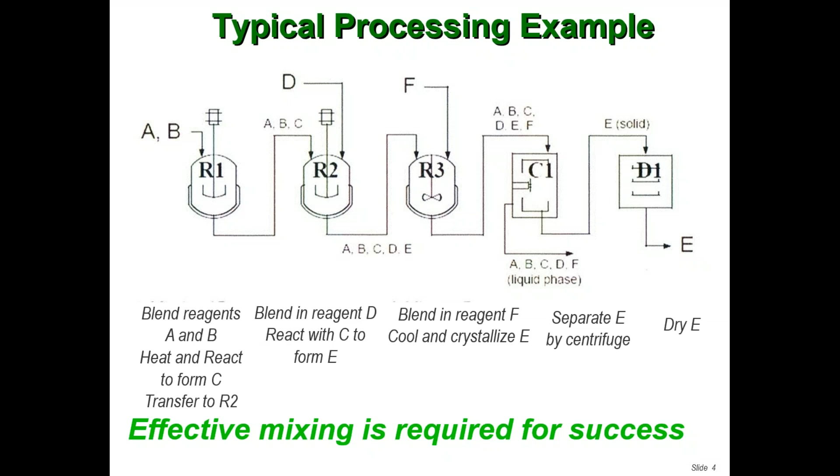So for the process to be successful, you see that for the blending, the reaction, the heat transfer, the cooling and crystallization, there is a device in there which we normally call a mixer. So it's important for the success of the process that the mixing is done effectively. That's one of the key messages that I want to share with you today.

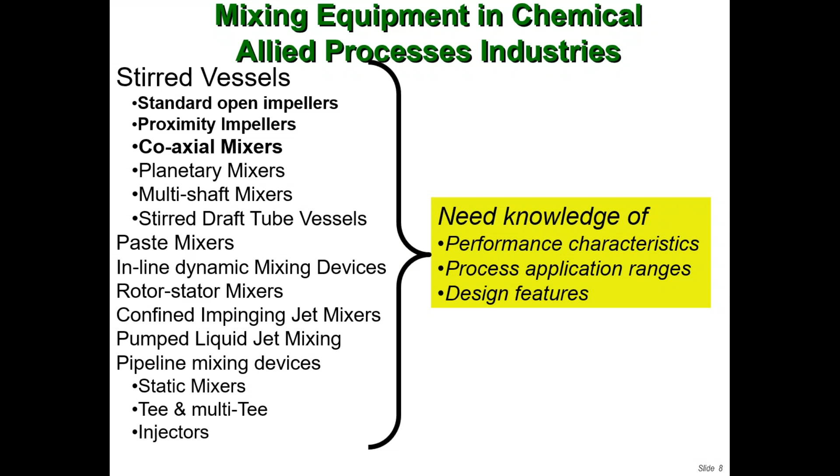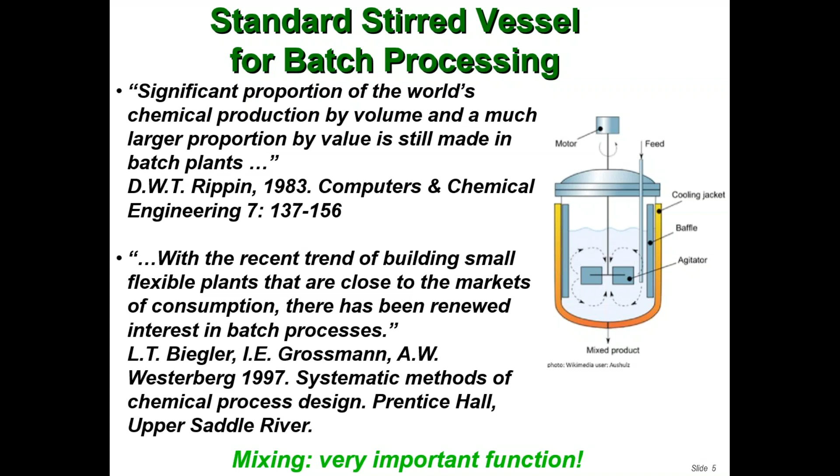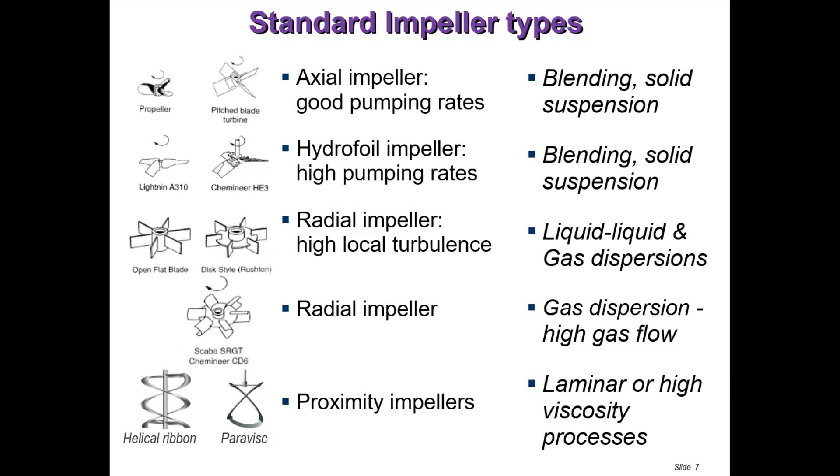In that piece of equipment, there is a variety of impeller types and so on. Today we're not going to spend time describing these various impellers, apart from this one slide. When we get to the device itself in the next webinar, we can talk about these impellers and how they're used. But this slide shows you some of the typical impellers that are used and what they are usually effective for.

If you are a process engineer, and I don't know all who are signed up for this webinar today, so I don't know your background, but if you're a process engineer, quite often your focus is on the pieces of equipment itself.

When I first started studying mixing, which I did at Dow when I worked there, it became very clear to me that it's misplaced to focus initially on the equipment. I think it's more important to look at the process, and particularly to ask some of these process-related questions. These questions seek understanding of the important phenomena in order to apply the necessary engineering science. If we do that, we are able to achieve the desired process results. The questions lead to identification of the potential risks in scale-up as well as process operation, and thus the preparation of appropriate contingency plans for risk management.

So in this webinar, we're going to be looking at some of these important mixing phenomena.

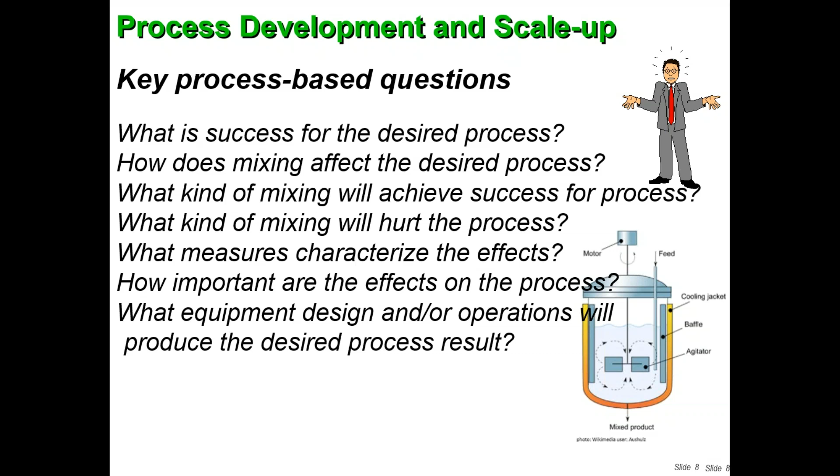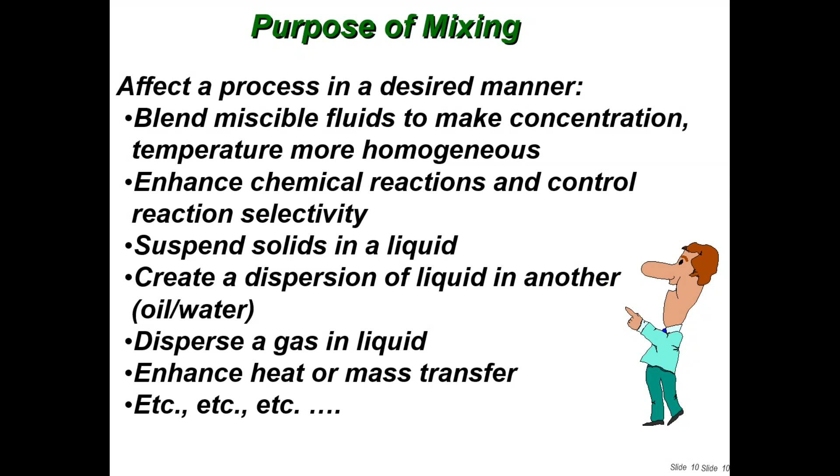This has been a working definition that I've used all the time, the 34 years that I was at Dow. And it served a purpose because what I've tried to do is encourage people to avoid the use of the word mix in describing what occurs in the process vessel. Instead, use words that will help them describe what is happening in the process, in the fluid.

My mentor used to tell me that it's good to imagine that you are a Maxwell demon attached to a molecule in the fluid, experiencing various phenomena. If you are able to describe the phenomena occurring whilst you're floating around in the vessel, I think it gives you a much better insight as to what is happening and what you need to do to be successful in your process.

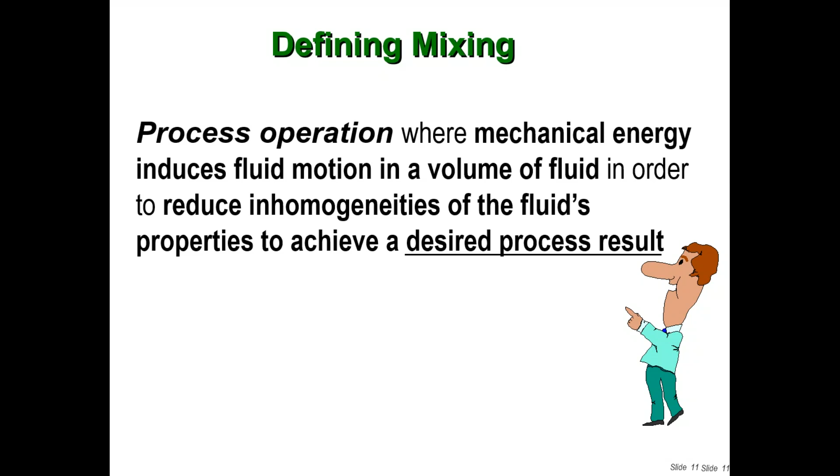So with that definition, we see that a mixer converts mechanical energy into kinetic energy to induce a hydrodynamic environment in the vessel. There is bulk or macro flow occurring, and there are microflow turbulent eddies also occurring. As a result of the different velocity gradients and so on, there's shear stresses and strains also occurring in the vessel. What we need to do is make use of all of this.

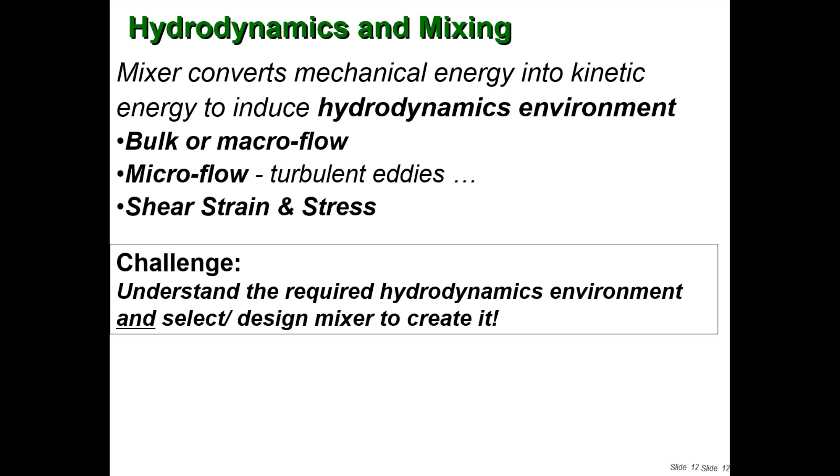The challenge is to understand this hydrodynamic environment and select and design a mixer to create the environment that is best suited for the success of the process. So the goal is to use the energy efficiently, to convert the mechanical energy efficiently to create the appropriate hydrodynamic environment.

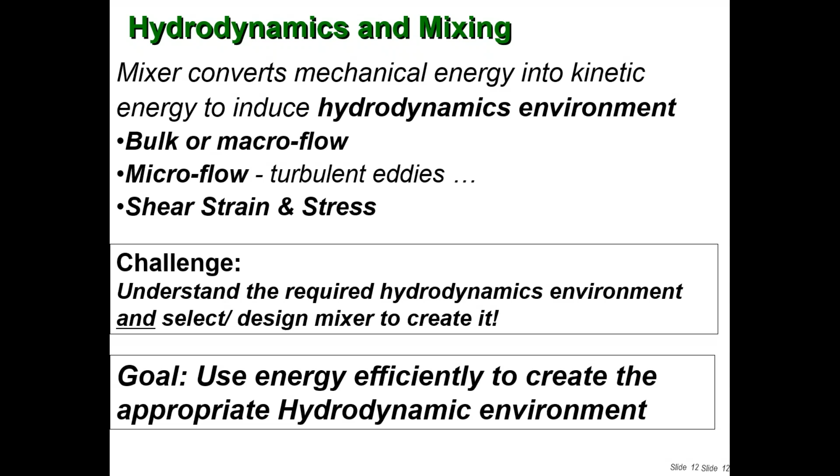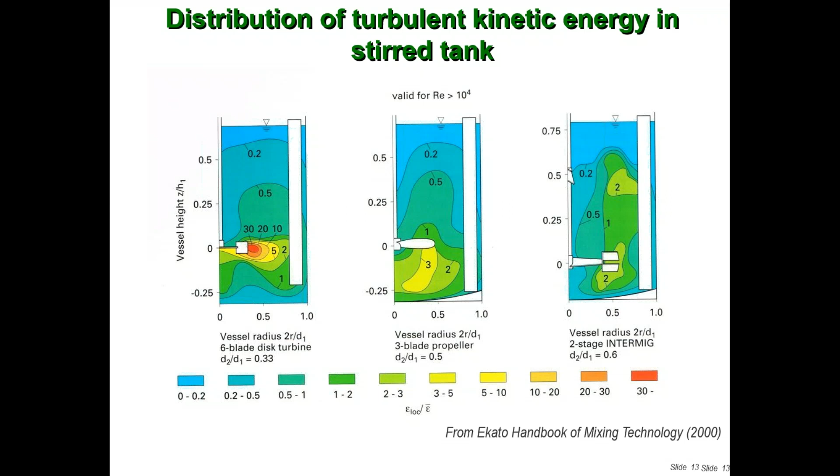Just a couple of years ago, Professor Suzanne Kresta in Canada noted this paper was one of the most read articles from the Journal of Industrial Engineering, Chemistry and Research in 2011. It's instructive that Octave Levenspiel did not use the word mixing, and instead used flow patterns and contacting, that is hydrodynamics. Further, he did not say chemistry, instead he said kinetics. His message is one cannot design an effective reactor without paying close attention to the hydrodynamics, flow patterns, and contacting.

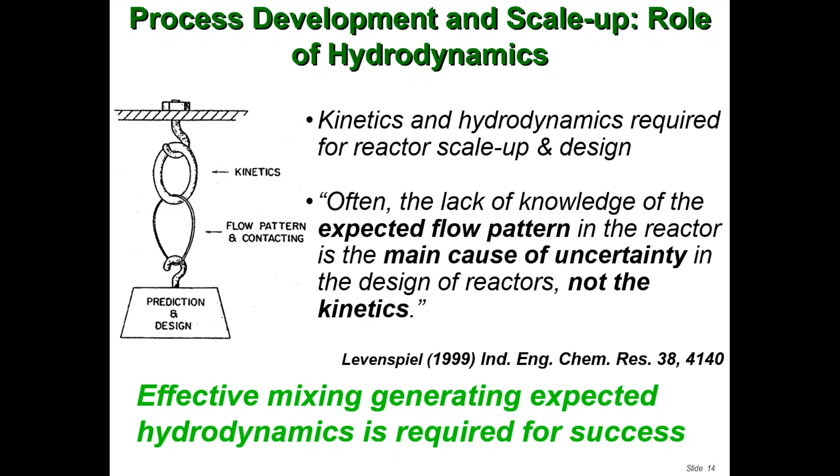So the lack of knowledge of the complete kinetics may not be as consequential. My experience is indeed very true. One can have the complete kinetics, but if the necessary hydrodynamics are not realized, the results can be disastrous. So effective mixing, generating the expected hydrodynamics, is required for success.

Now, the hydrodynamics in a vessel can be classified as laminar or turbulent. And indeed, when we talk about Visimix in the next webinar, you will find out there are two sets of tools, one devoted to laminar mixing and a couple devoted to turbulent mixing.

And the hydrodynamic parameter used to describe whether you are in laminar or turbulent flow is obviously the Reynolds number, which depends on the fluid properties, the density rho, viscosity mu, and also a characteristic fluid velocity in the vessel, and a characteristic length scale of equipment.

Typically, in the mixing literature, you find that the characteristic velocity is the tip speed, or the impeller diameter times the impeller rotational speed. And the characteristic dimension is d, the impeller diameter.

Now, Visimix does not use those characteristics, velocity and diameter, and we'll talk about that when we discuss the tools themselves in the next session. But the point here is that the consequences of being in laminar or turbulent flow needs to be paid attention to, because the mixing mechanisms are different and the equipment requirements also differ. You'll see that when we address the next webinar, when we talk about the Visimix tool.

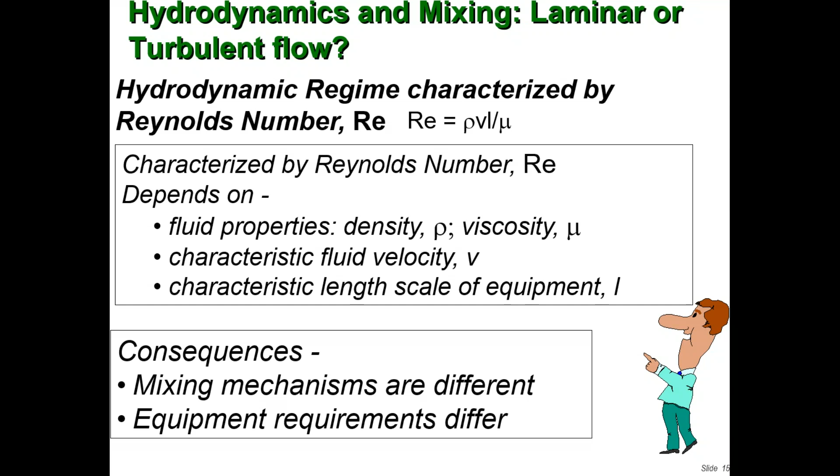Now, most of you spend some time in the kitchen preparing various things.

I want us to consider these cases in describing mixing processes.

Preparing a drink, rum and coke, or sweetening tea and coffee with honey or granular sugar, or making salad dressing using oil and vinegar, or preparing bread dough with flour and water.

Now, when we do these things, we use a variety of equipment. For the first one, we can just use a straw to stir your rum and coke, or a spoon to stir your coffee, and when you add the honey or granular sugar, you dissolve it and distribute it uniformly so that the first sip is as good as the last. Or when you prepare salad dressing with oil and vinegar, whatever tool you use to distribute the oil into the vinegar.

The key point here is that in each case, when we do these things, we use the word mix or stir. But it's very obvious that we are dealing with totally different phenomena in the rum and coke, sweetening tea and coffee, making salad, and so on.

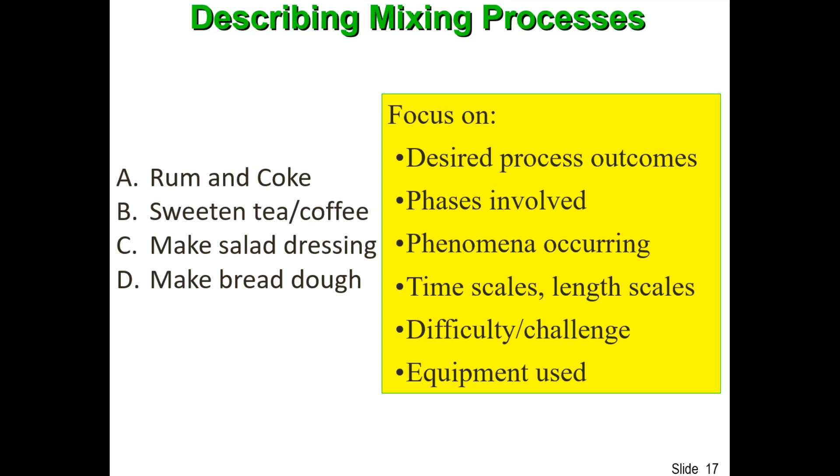When I was there, one of the things I kept pressing, telling people about, is that when you're doing process R&D or scale up, you need to pay attention to both physical properties - phases, densities, viscosities, and rheology - and of course the chemistry, whether you have chemical equilibrium or kinetics, fast or slow, you pay attention to all of those. But then also, as I've already mentioned in previous slides, the hydrodynamics and the various other transport phenomena that are important for your process, mass transfer or heat transfer.

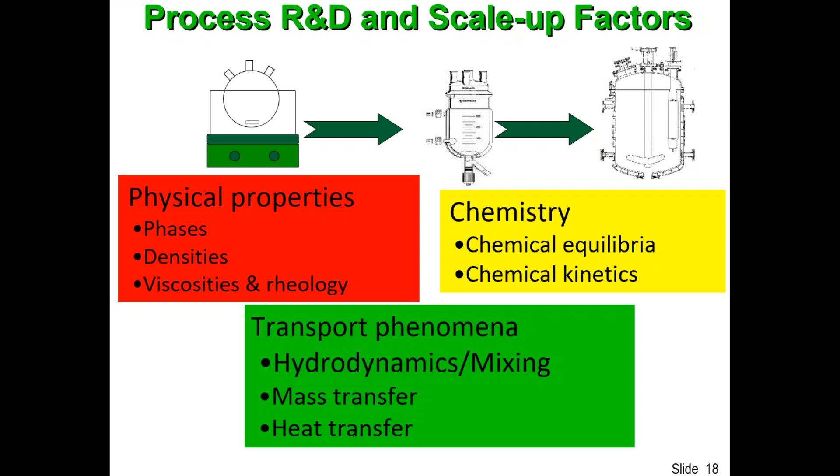If you do not pay attention to all of these things, the likelihood is that something is going to bite you, and you're going to suffer in achieving the success in the process that you desire.

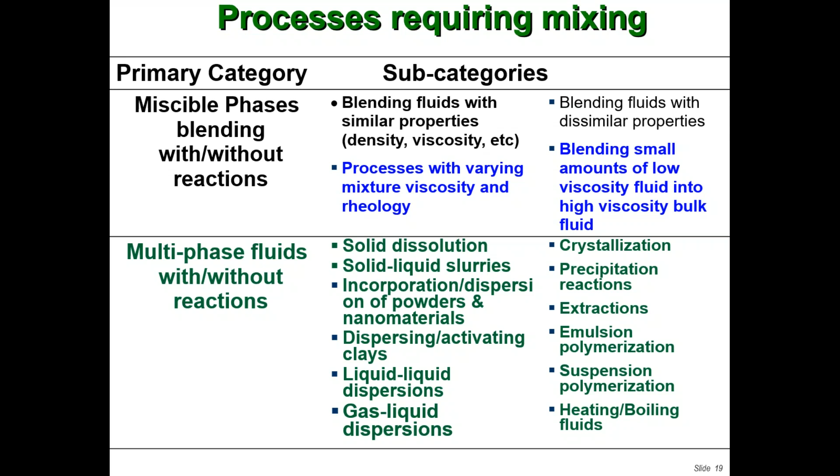So here again is a list of various processes that are carried out. And as I said, this is not intended to be exhaustive in any way. I'm sure you can come up with other things that we can add to this list.

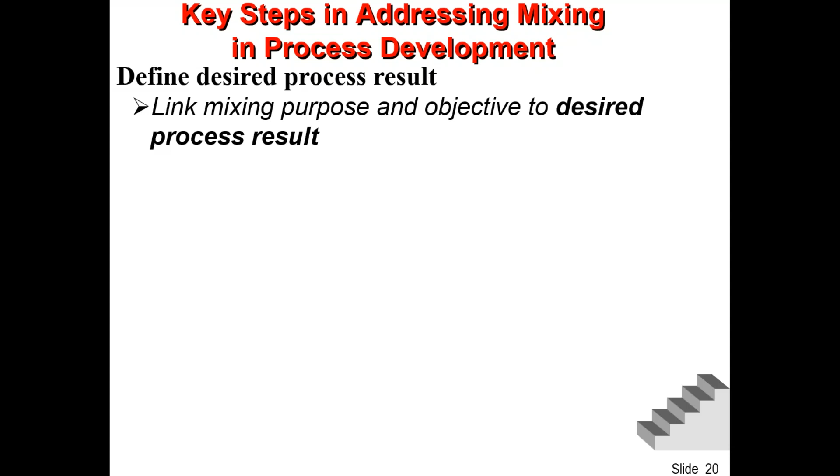But one of the things I learned in my time at Dow is that it's important to have in mind some key steps in addressing mixing in process development or in the process plant. Always start with identifying the desired process result and find a way to link that to the purpose of mixing.

Now, once you do this, the next stage is to perform some analysis. The analysis could be either experimental or you could do some modeling. People do computational fluid dynamics sometimes, but there are also simpler tools like Visimix, which we'll talk about in the next webinar. So you do this analysis to confirm or identify the mixing phenomena occurring and how it relates to the desired process result.

Once you do that, you can then recommend or select equipment and operating conditions that would be best to achieve the desired process result. And after you've done that, you need to ascertain the reliability of the mechanical design.

You will find that the Visimix tool allows you to do all of these things that I have listed here. Sometimes the folks at Visimix will tell you that using Visimix, you can avoid doing experiments. And I tell them that's not true. You can minimize the number of experiments that you do, but it's always good to confirm some of these things with experimentation.

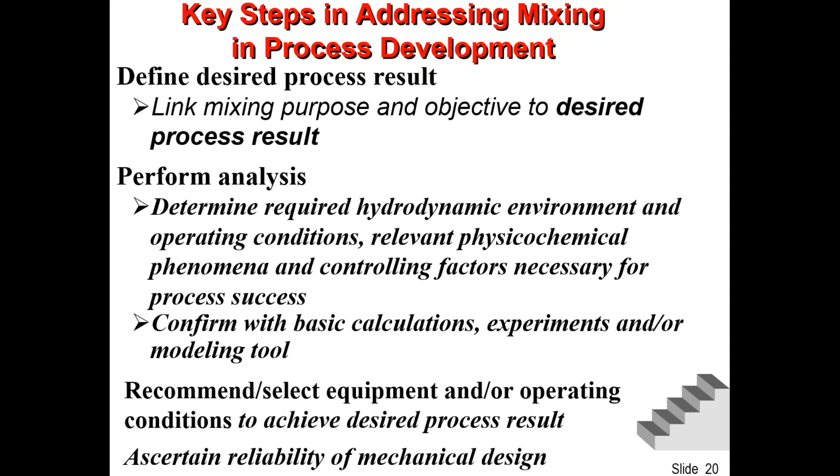So now let's take a look at some of these different mixing phenomena that occur in various mixing equipment and stirred vessels. The first one we're going to look at is the phenomena of blending.

So if the dye were to react, reaction rates will vary throughout the vessel because of the difference in concentration. If there are multiple competing reactions that are faster than the mixing action, the outcome may be different from what is desired. There's one slide that we'll take a look at for that.

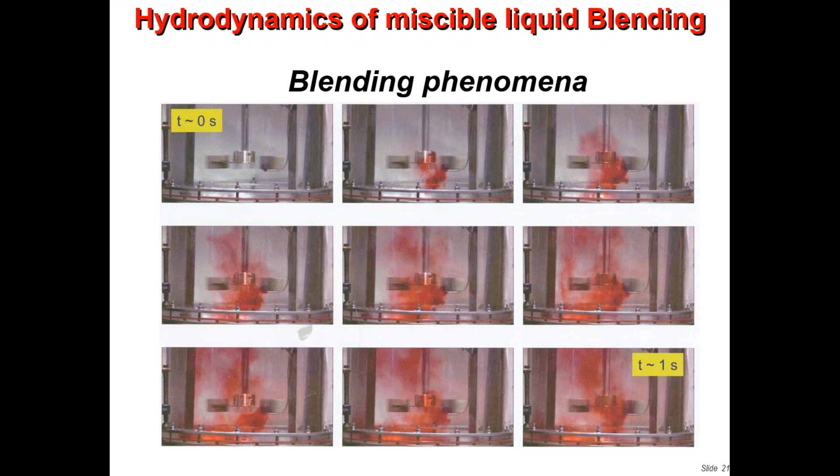If you use a different impeller, if you add at different rates, if the additive or reagent you're adding has different fluid properties than the bulk, the speed of the stirrer, its size, design, location, and the vessel internals such as baffles or heating and cooling coils - one needs to pay attention to all of these.

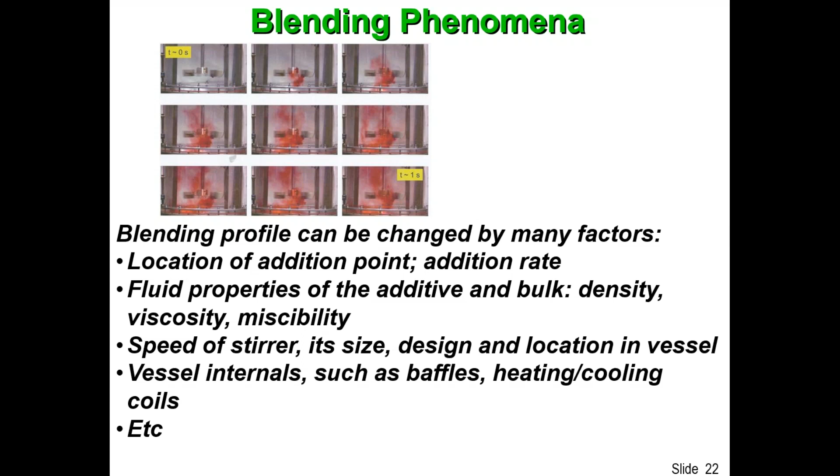If you look at solid-liquid mixing, the goal is to suspend particles - in other words, pick up the particles from the base of the vessel. Because if they are denser than the liquid, they want to settle, and your goal is to pick them up from the base of the vessel and separate them.

If you have very light solids, the challenge will be to wet the solids - in other words, spread the liquid all over the entire surface, or to draw down the particles from the liquid surface into the fluid.

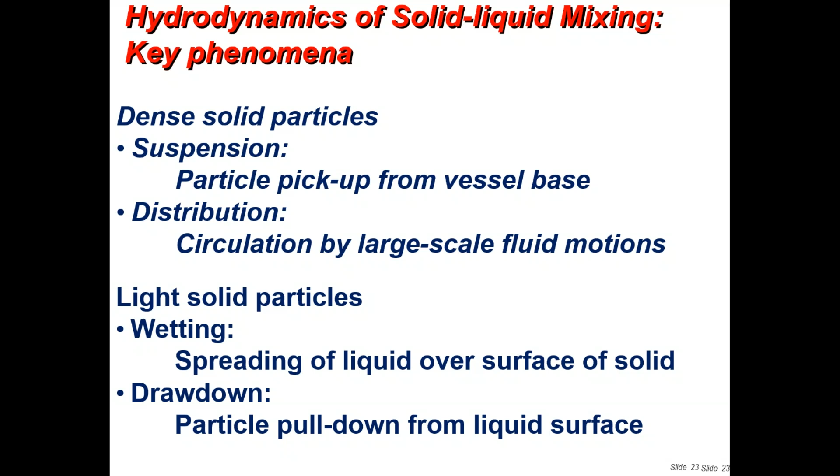This is something that early in my career I came across courtesy of Lightnin, another company that made mixers. I showed these 3 panels here, showing three tanks of the same dimensions, with 3 different impellers, different sizes, with different D over T's - impeller diameter to tank diameter - operating at different speeds.

The performance of the impeller in its ability to suspend these solids varies significantly. In each tank, you're putting in the same amount of power, but the torque, as defined there, is very different. In fact, the biggest torque - the vessel that requires the biggest gearbox - is the panel on the right. Yet that's the one that, if your intent is to lift particles up, does the poorest job.

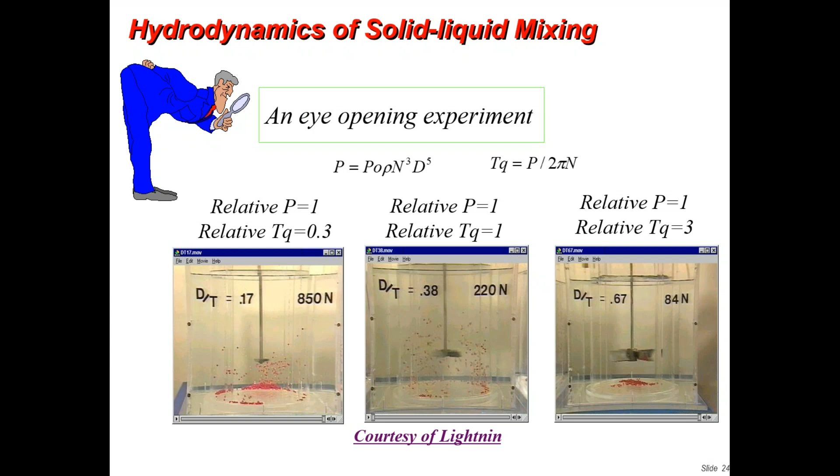I don't know whether these videos will play, so I will avoid them for now. Let's move on.

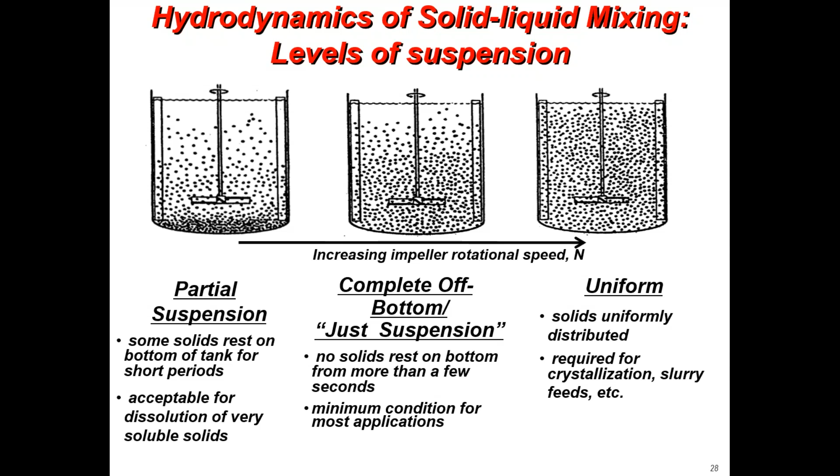For example, partial suspension may be acceptable for dissolution of very soluble solids. You don't need to lift them all up - if they're very soluble and you keep swirling them at the bottom of the vessel, that would be sufficient, and so that's what you do.

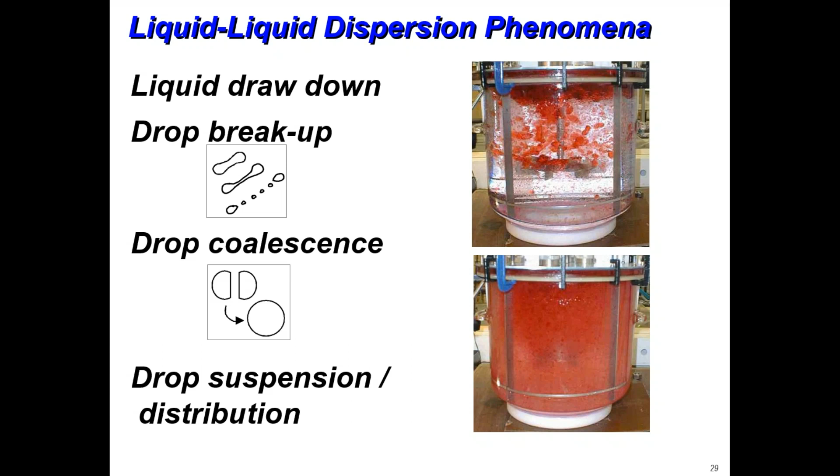Another phenomenon is liquid-liquid dispersion, where you're taking drops and breaking them up. But when the drops meet each other, they coalesce, depending on the force of collision and the viscosity of the fluid between them, and can form a bigger drop. So both drop breakup and coalescence are going on, but you also want to distribute these drops in the vessel uniformly, depending on the process you're carrying out.

Drop breakup and dispersion requires a threshold of energy - you need to put in a certain minimum amount of energy before you can actually break drops. It's easier with bigger drops, and it's facilitated in liquids with lower viscosities and lower interfacial tension, so you can add surfactants and stabilizers. But drop coalescence and aggregation will continue even when you're breaking drops, and these are also influenced by the energy input and the properties of your fluid.

This is a challenging area for processes, but when we talk about Visimix in the next discussion, we find out that we're able to use Visimix to actually do some drop size calculations and distribution and so on. We'll address some of the physics involved when we get there in the next webinar.

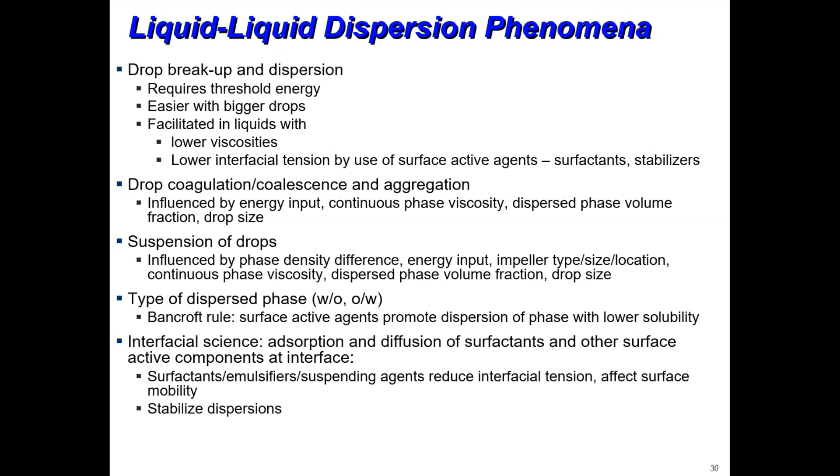Liquid-liquid dispersion process objectives will vary according to the desired product, but they would include the nature of the dispersion, whether it's oil in water or water in oil, or sometimes complexes like oil in water in oil, the drop size distribution, the time it takes to reach a certain equilibrium drop size, and the stability of the dispersion.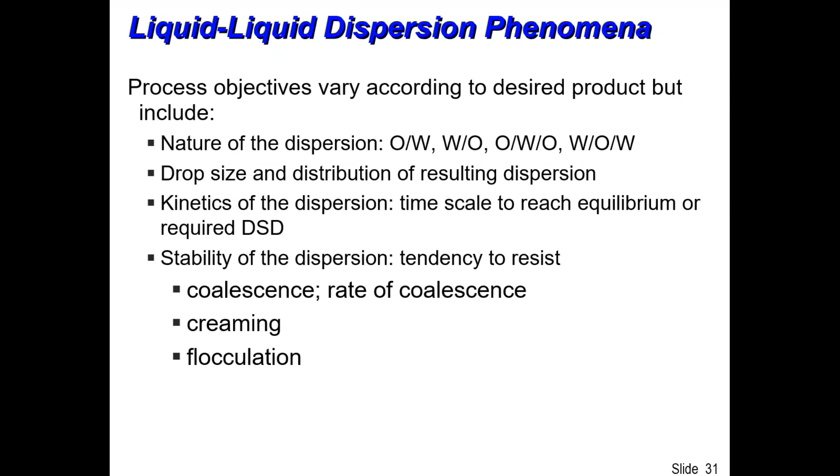Some of these things are very challenging, and I don't know of any tools out there that are able to address all aspects of liquid-liquid dispersion yet, including the tendency to resist the coalescence rate that is occurring.

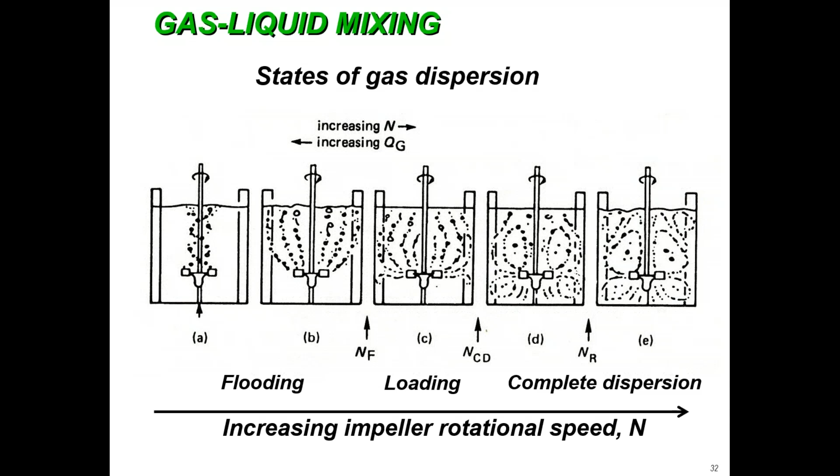In gas-liquid mixing, we are also breaking up bubbles. We bring gas in and we want to break up the bubbles into small bubbles to create interfacial area and distribute them uniformly throughout the vessel, again to affect the process that we are carrying out.

For reactions, mixing affects how reactants are brought together, and they determine the local concentration and temperature, reaction rate, and other properties. Thus it affects the course of the reaction rate and selectivity.

For single reactions, blending can affect concentration of reactants and reaction rate. For multiple reactions, blending can also affect selectivity. For multiphase systems, mixing affects drop and bubble sizes and thus the interfacial area for mass transfer. So it's important to vary mixing in your studies to determine the effects of mixing and which is important.

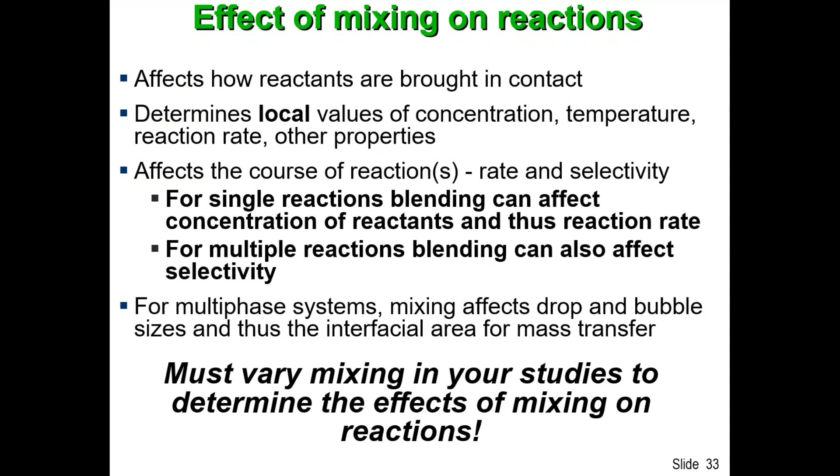Here's an example, something that some of you have seen many times before. We have a case with two reactions: the desired reaction is A reacts with B to form R, and R reacts with B to form S. Let's suppose you've segregated reagents A and B perfectly, say with some special membrane. Then you take out the membrane.

Now you can see in this left panel at the bottom what happened. These two A's will react and form R. But if the mixing is poor, what you'll end up with is that the R will react with B and you form S. So what you get is this condition, which is most undesirable.

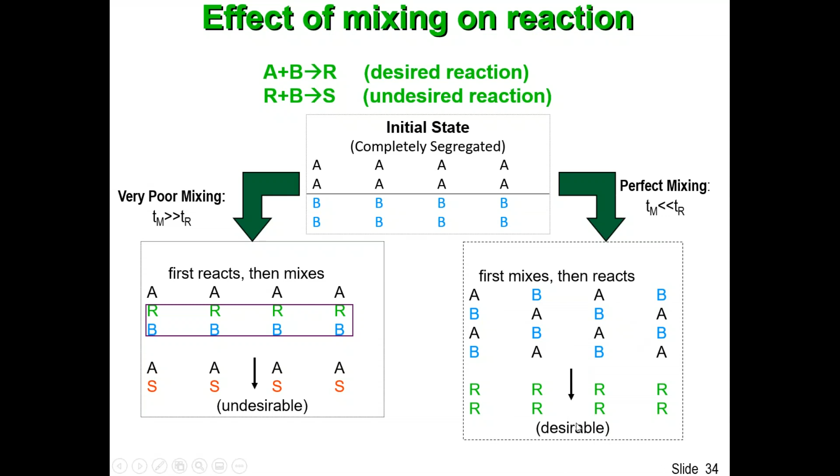However, if you have very good mixing, when you take out this special membrane and you have full mixing of all the molecules, you'll be able to successfully form only R, and that's what you desire.

This is an example from the literature, Chemical Engineering Science, 1995, published by Baldyga. The only thing he's doing here is using two similar vessels with the same impellers, and the only difference is the location where the reagents are added. It's a precipitation reaction being carried out. In one vessel, the reagents are added right near the impeller; in the other, they're added at the top of the liquid.

You can see with the supersaturation profiles that the results of the products you get are very different. With the sharp supersaturation profile, many small crystals and a non-uniform crystal size distribution are formed. With the broad supersaturation profile, you get larger and more uniform crystals. So again, it depends on what it is that you desire to do.

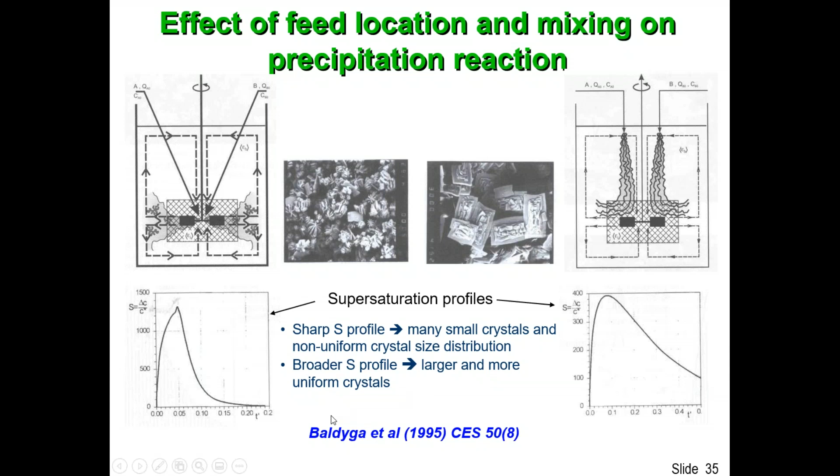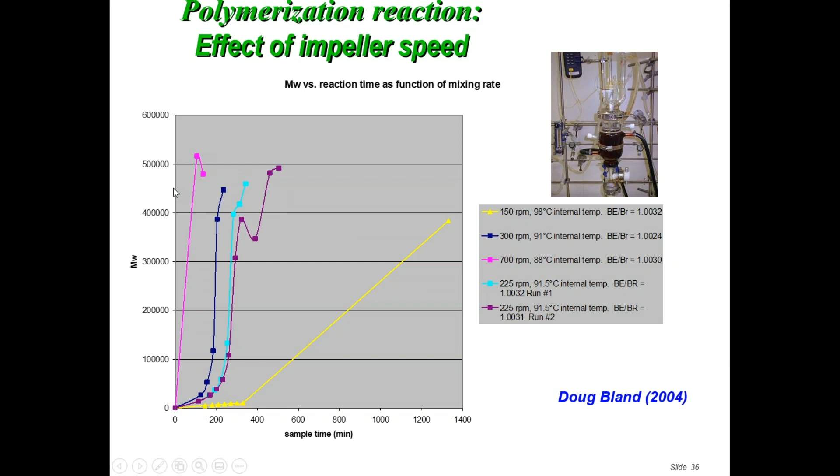Here's a case of a polymerization reaction, and all you're doing is changing the impeller speed in this small vessel. The first time the chemist did it, he ran it at 150 RPM at 98 degrees C. He kept taking samples and it seemed like nothing was happening, so he left it for many days, and then saw the reaction was taking place, but very slowly. So when he sped up the impeller, look at the changes that happened: the reaction is done, in this case at 700 RPM, in less than 200 minutes.

Here's an example of a very complex reaction where you're reacting an amine with chloroacetyl chloride, with sodium bicarbonate as a solid in water. You try to provide a buffer solution and also react the HCl that is formed. So it's a very complex reaction: you have solids, immiscible liquids, the product is also a solid, and you have gases that are released.

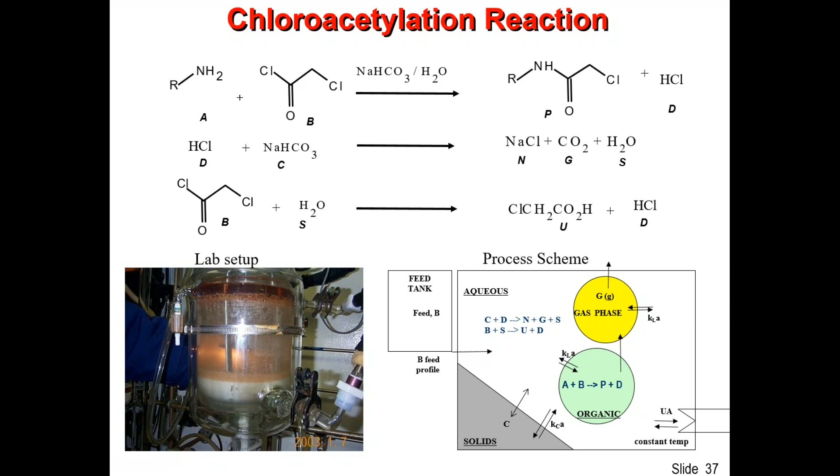By putting different numbers of impellers running at different RPM, varying the feed rate of the reagent and so on, you can affect the yield that you get.

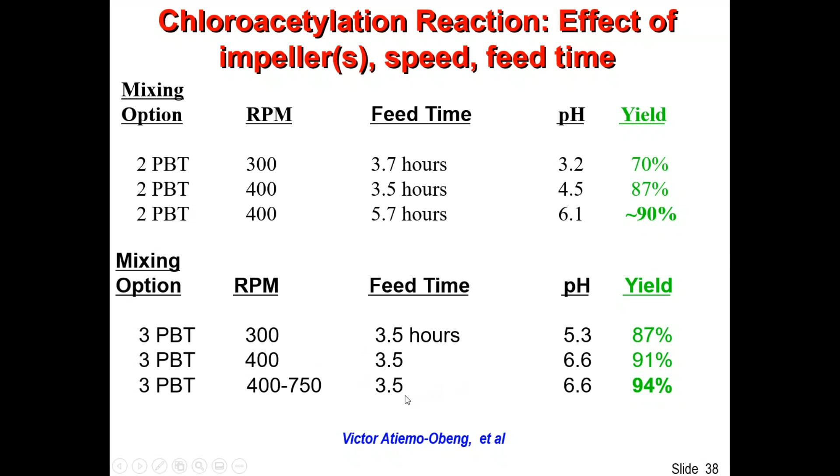So the message that I want to leave with you is that mixing challenges require close attention. If all you're doing is blending rum and coke, well, it's an easy objective and easily achieved. If you're doing scale up, it's important that you pay attention to what it is you're doing. If you have multi-phase systems,

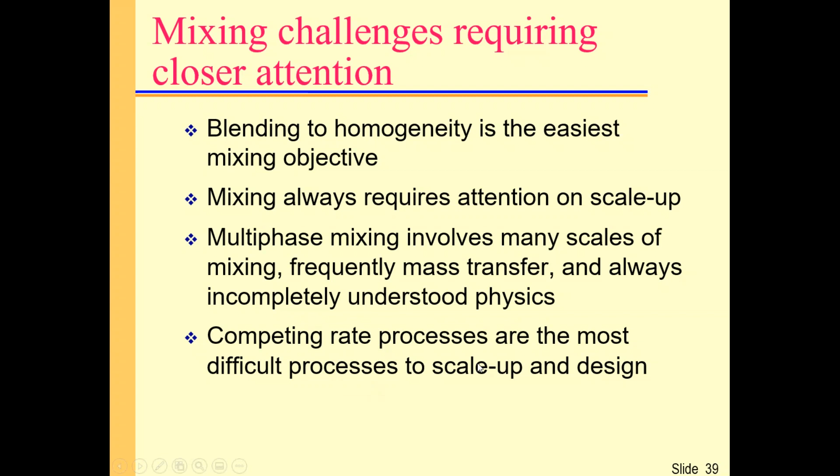most likely you are going to have to address many scales of mixing, frequently mass transfer aspects, and always incompletely understood physics. So it's important to use experiments or a tool that gives you insights as to what is happening in your process. Also, when you have competing rate processes, these are also very difficult to scale up and design.

Some of the mixing operations that I found most challenging are listed here. When you're blending higher density, higher viscosity miscible liquids into thin bulk liquids. Blending or reacting as viscosity increases and rheology changes.

Incorporating or dispersing or dissolution of powders into viscous bulk. So these are all very challenging things. These are all miscible systems, but you can have these challenges.

In solid liquid, incorporating or dispersing poor wetting solids into liquid, when the solids have a tendency to agglomerate. For example, polymer pellets during dissolution, when the outer skin contacts the solvent, it swells up and gets tacky, and it would glom onto other pellets and form an agglomerated mess.

Achieving suspension of fragile needle-shaped crystals with minimal attrition, settling and packing of solids in the vessel bottom, and sometimes encrustation of solids on wetted surfaces during crystallization or precipitation.

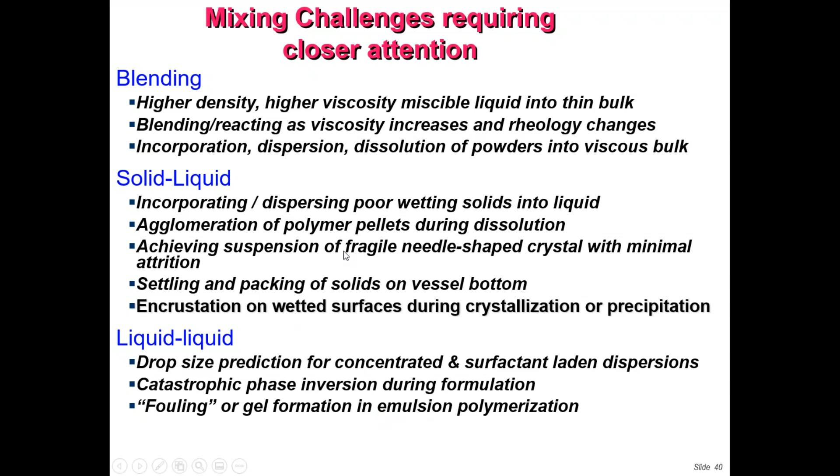Predicting drop sizes for concentrated and surfactant-laden dispersions. Those are tough. And sometimes you may have catastrophic inversion of phases during formulation, for example. And then, of course, fouling or gel formation during emulsion polymerization. These are some of the things that I encountered in my time.

So to conclude, some important lessons. Because mixing is very complex, as you've seen in these examples that I've shown you, process failure can happen. And it can happen if you don't pay adequate attention.

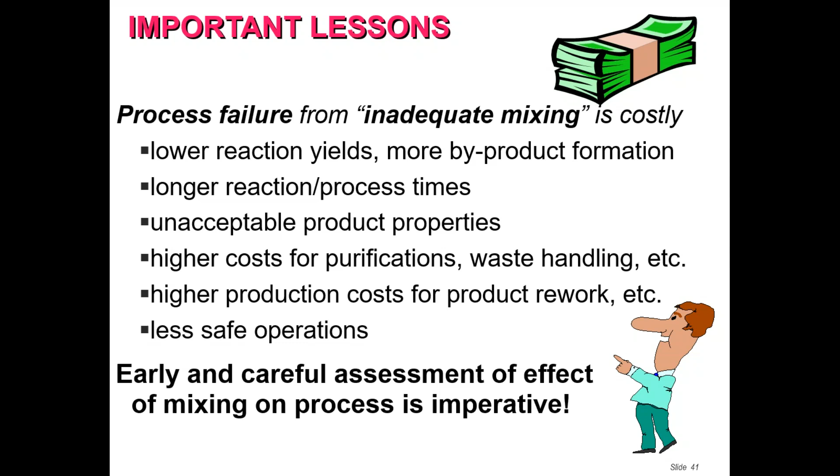And process failure is really the costly thing to encounter. From lower reaction yields, longer reaction times, unacceptable product properties, or making impurities that require higher cost for purification and so on, or handling the waste. Higher production costs for product rework and so on.

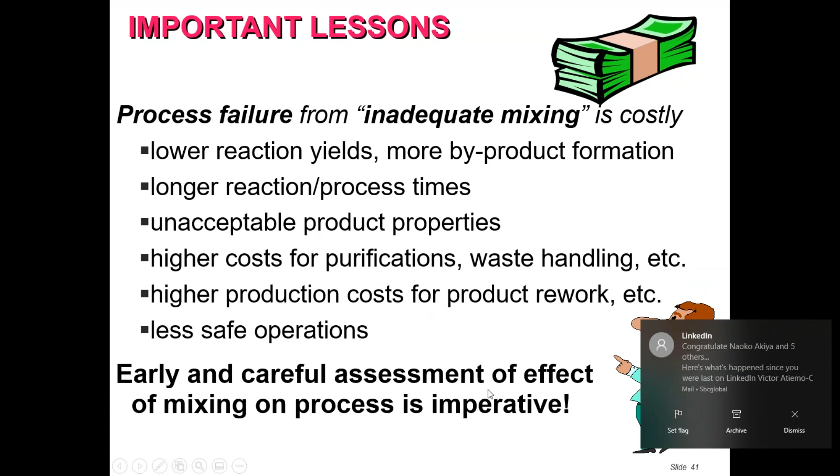So early and careful assessment is important. If you are able to do early assessment, you can affect your process in some very positive ways, because you can determine how to make changes quickly and avoid costly mistakes.

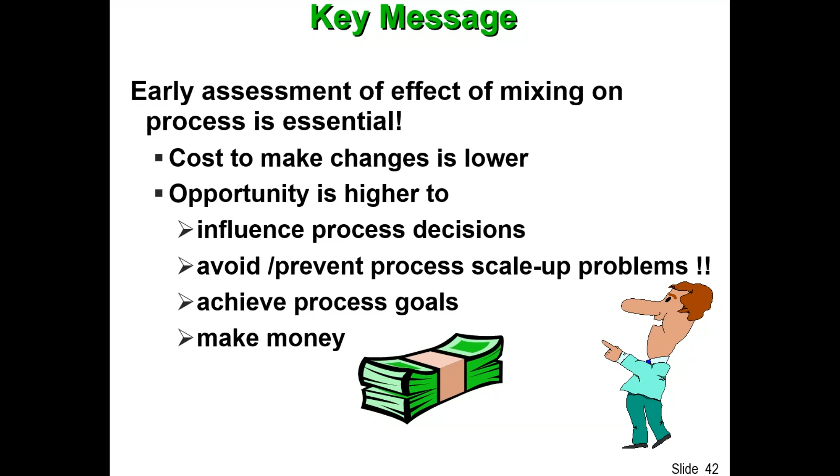And usually, if you're able to identify these mistakes early, the cost to make changes is much lower. The opportunity to influence the process decisions is very good. Avoiding and preventing process scale-up problems is important, and you'll be able to achieve your process goals and make money. And that's what we are after.

Now, this slide shows you all of the interaction of mixing phenomena that you can perform with the tool Visimix. It will calculate hydrodynamics, determine the turbulence and energy dissipation inside the vessel and the fluid. We can do heat and mass transfer calculations.

In the suite of tools, you can do mechanical reliability calculations, stress and vibration. You can use the tool, once you determine the hydrodynamics, to do liquid-liquid, liquid-solid mixing, multi-phase systems, gas-liquid, and liquid-liquid dispersions, applying the hydrodynamic and turbulence information. And you can also address chemical reactions using information from the turbulence calculations and so on.

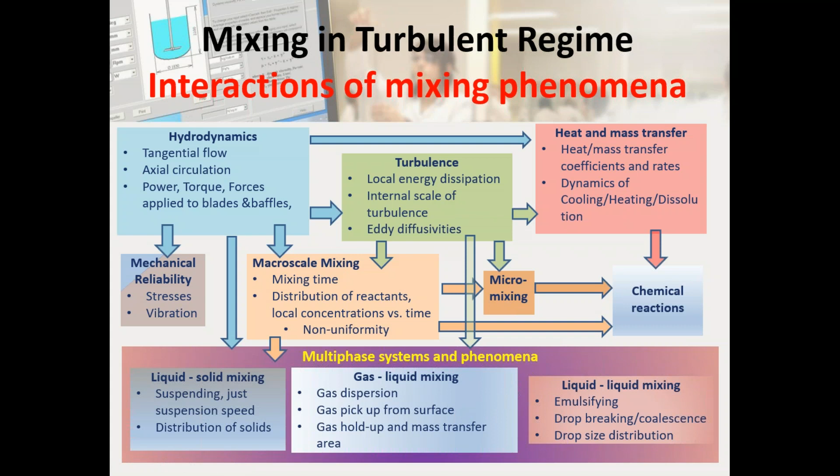And this is what makes Visimix such a productivity tool. And that's what we will look at next in this webinar series.